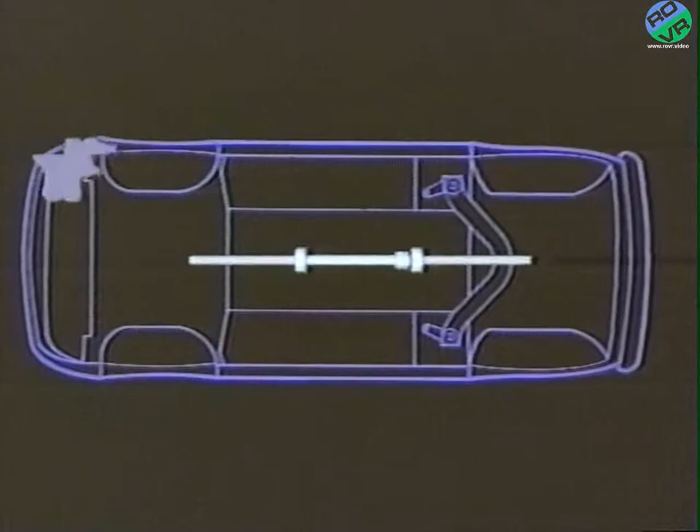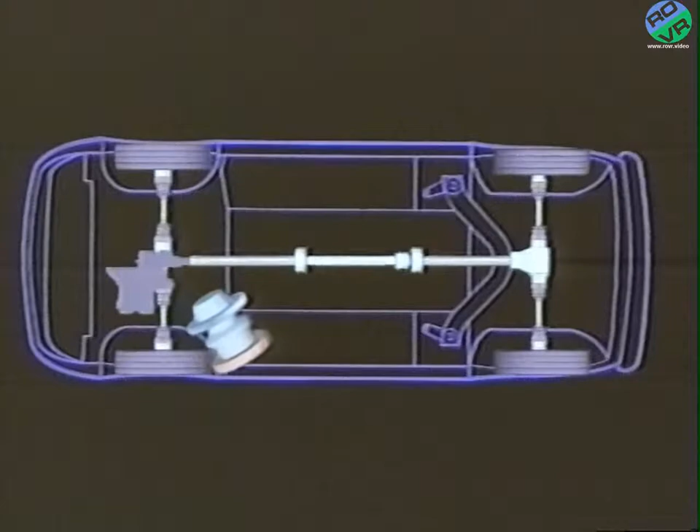The Talon's all-wheel drive system uses a center differential mounted on the output shaft of the conventional W5M33 front-wheel drive manual transaxle to distribute drive power to the front and rear wheels. Enclosed in the manual transaxle along with the center differential is a viscous coupling that controls differential action between the front and rear wheels.

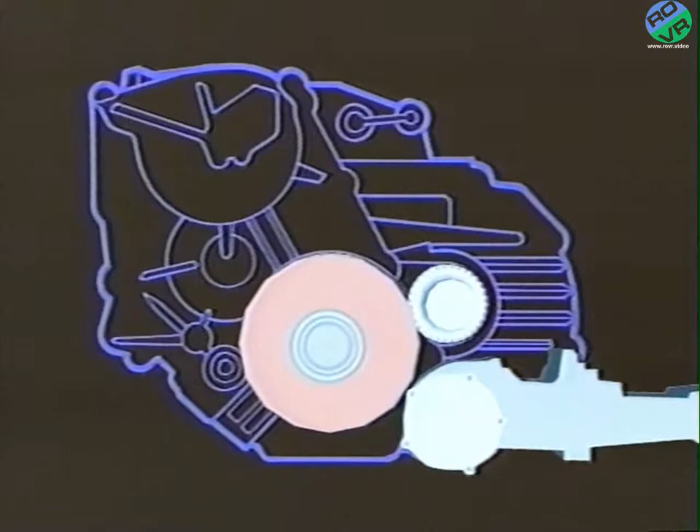Differential action by the viscous coupling takes place between the outer and inner hub of the center differential case. The outer hub delivers power to the front output shaft, driving the front differential. The front differential is an open type, located inside the transaxle. The inner hub is locked to the center shaft, or rear wheel drive shaft, delivering power to the transfer assembly and propeller shaft assembly, driving the rear axle differential.

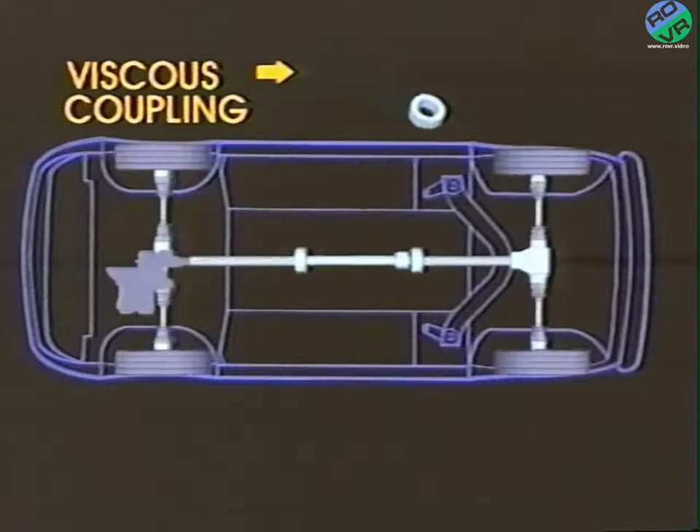There are two rear axle differentials available in the all-wheel drive system: the standard open differential and the optional viscous coupling type limited slip differential. The limited slip differential can be identified by a tag on the back of the housing.

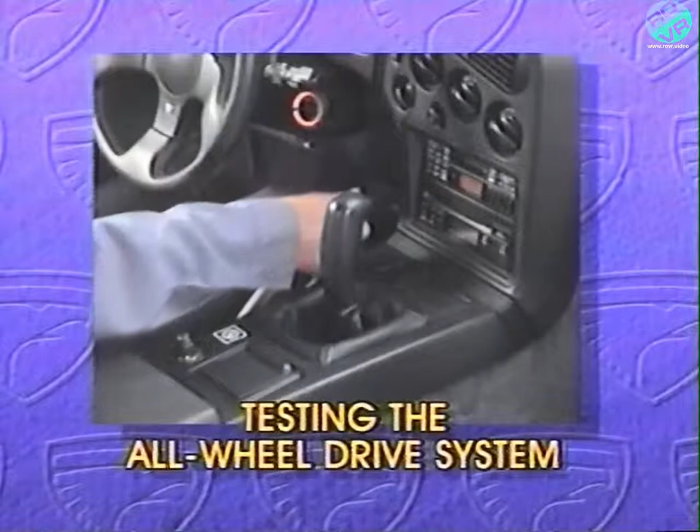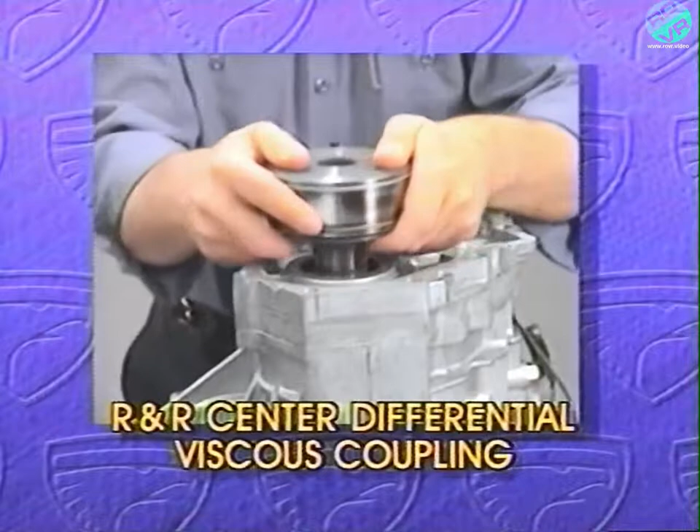Well, that's a general description of the all-wheel drive system, but today we're going to go a little deeper into this unique system. We'll explain how a viscous coupling operates and how it affects the operation of the all-wheel drive system. We'll provide you with a method for testing the viscous couplings on the all-wheel drive system. We'll take a look at the viscous coupling at the center differential and go over the procedure for removing and replacing it. And then we'll remove the viscous coupling from the limited slip differential in the rear axle.

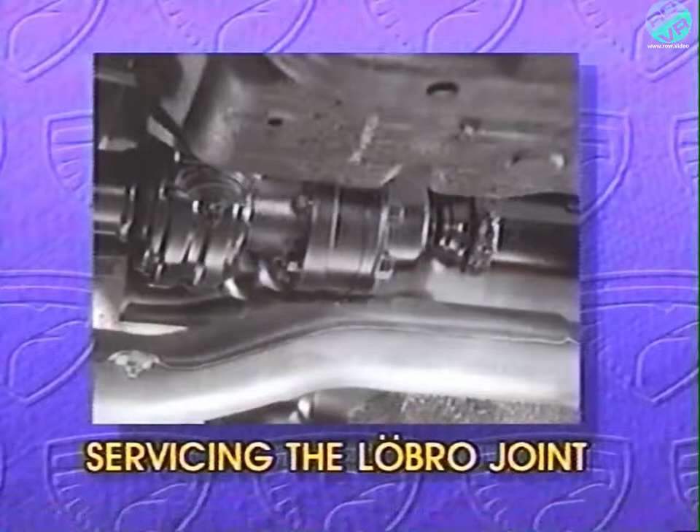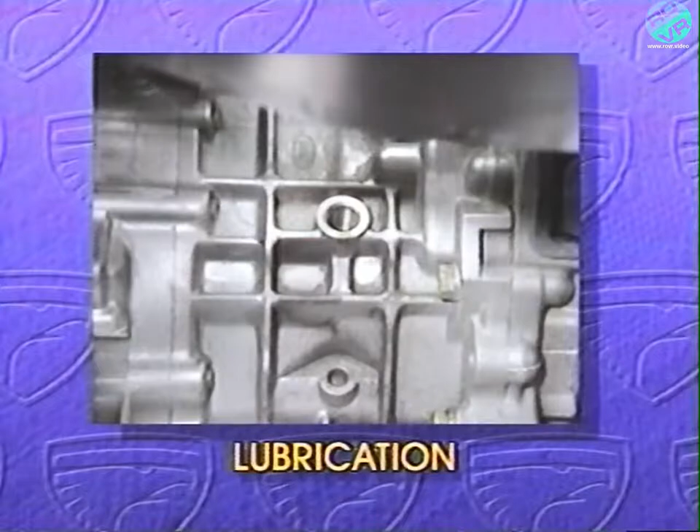We'll provide you with the servicing procedure for the Löbro joint on the prop shaft. And we'll discuss towing procedures. Finally, we'll discuss lubrication of the transaxle, transfer assembly, and rear axle of the all-wheel drive equipped Eagle Talon. So, let's get started by discussing how a viscous coupling operates.

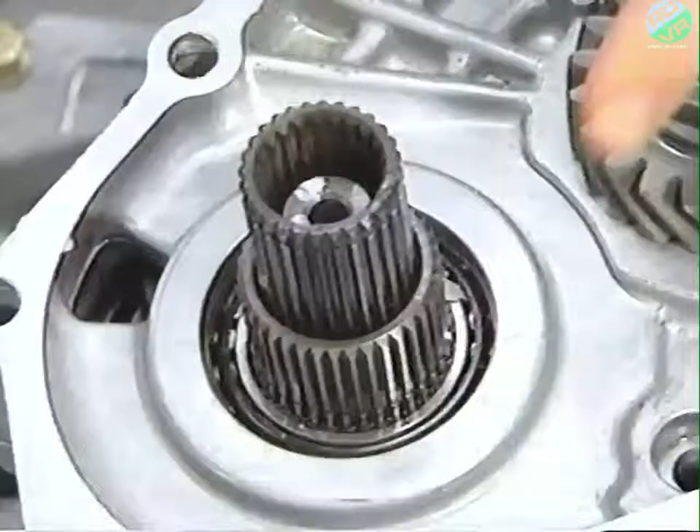A viscous coupling consists of two sets of plates which are splined to a two-part shaft assembly. At the viscous coupling on the center differential, the inner plates are splined to the inner hub of the differential, which rotates with the center shaft and drives the rear axle. The outer plates are splined to the outer hub of the differential, which drives the front axle.

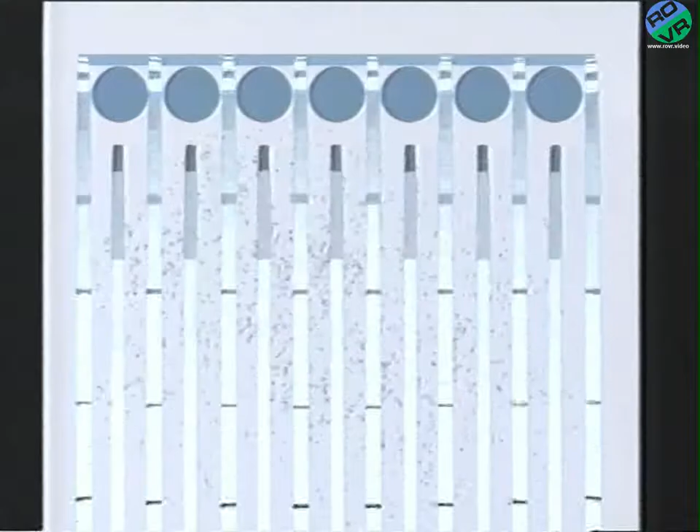Within the housing of the viscous coupling, the outer and inner plates are arranged alternately. The outer plates have spacer rings set between them on the outer edge in order to space them. The spacer rings are fixed to the housing. The inner plates have no spacer rings, and they can slide along the spline shaft between the outer plates. The plates are separated by a special silicone oil. The holes in the plates allow the silicone oil to flow through and to move with both inner and outer plates.

When the front and rear axles are moving at the same speed, the plates are moving at the same speed, and the viscous coupling does not differentiate torque. But when one set of plates begins to move at a higher speed, the silicone fluid exerts force on the slower moving plates to reduce the speed difference between the plates.

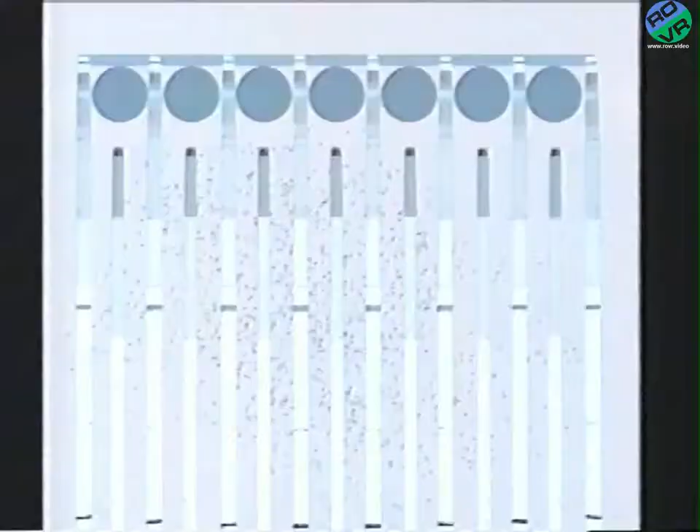Under extreme conditions, the temperature of the silicone oil rises. When this occurs, the oil escapes from between the plates and the plates lock together. This is called differential lockup. It eliminates any differential action and maximizes traction under slippery conditions. When the speed difference no longer exists, the temperature of the silicone oil drops and normal function is restored. This locking and unlocking of the viscous coupling has been termed humping.

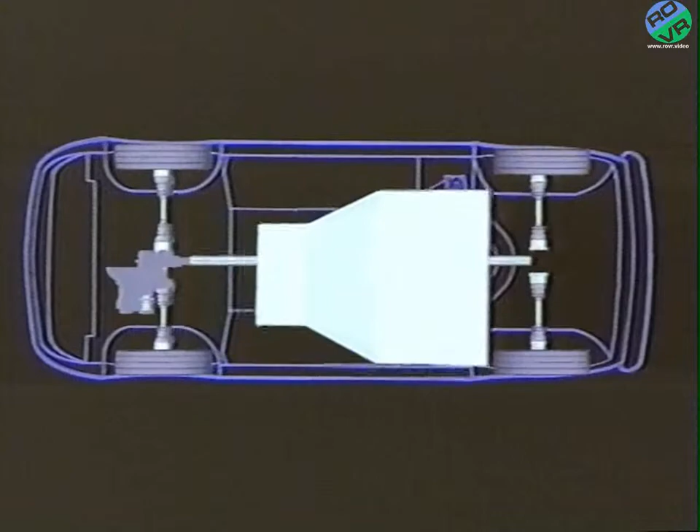Well, that gives you an idea of how the viscous coupling at the center differential operates and how it affects the operation of the all-wheel drive system. The optional limited slip differential in the rear axle uses a viscous coupling that has the same operating characteristics as the viscous coupling at the center differential, but it supplies torque between the left and right rear wheels. If you suspect that either the viscous coupling at the center differential or the viscous coupling in the rear axle is not working properly, you can verify operation by using the following procedures.

To test the viscous coupling at the center differential, raise all four wheels. Have a helper start the engine, release the parking brake, and shift the transaxle into first gear. Now, with the engine at idle, all four wheels should turn. If only the front wheels turn, the viscous coupling's not working properly.

Now, raise the RPM to about 1500 and slowly apply the parking brake. With the parking brakes applied, there should be a drop in RPM as a load is put on the engine by the viscous coupling, which is trying to equalize torque between the front and rear axles. Again, if there is no drop in RPM, the center differential viscous coupling is not working properly and should be replaced.

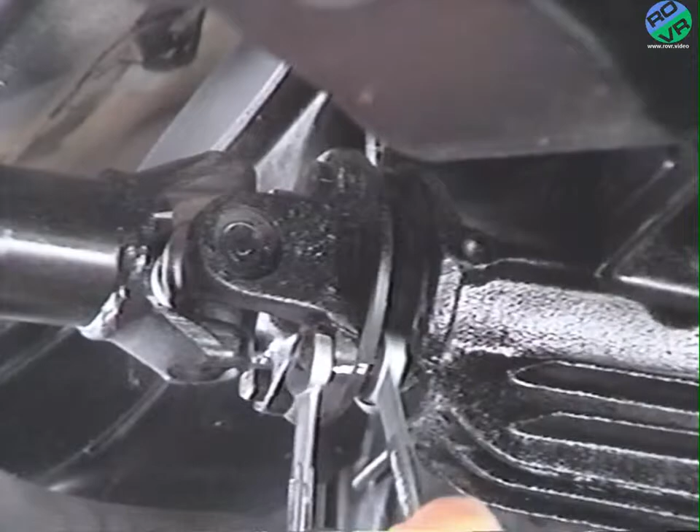To test the viscous coupling in the rear differential, move the transaxle shift lever to neutral and completely release the parking brake. Then raise and support the vehicle on the hoist. Place mating marks at the rear differential and propeller shaft coupling and remove the 4 bolts. Now, slowly rotate one of the rear wheels.

If the rear wheel on the other side turns in the same direction, the viscous coupling is okay. If the wheel turns in the opposite direction, replace the viscous unit. And remember, service the viscous couplings only by replacement. All right, now let's look at the procedure for replacing the viscous couplings. We'll start with the one in the transaxle.

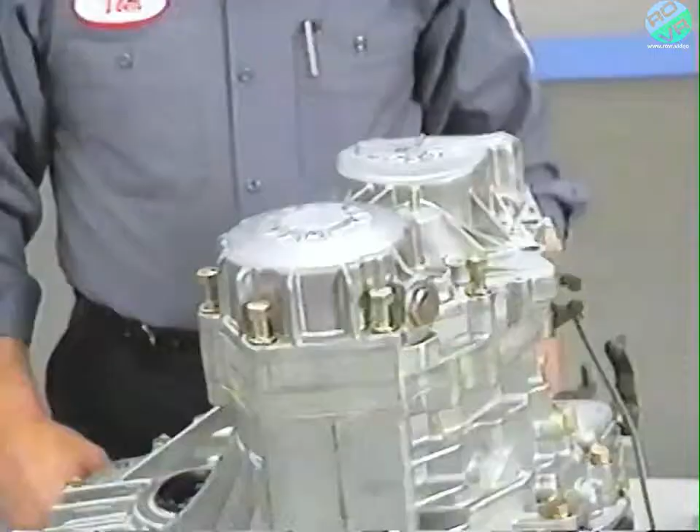In order to remove the viscous coupling at the center differential, you must remove the transaxle from the vehicle. This procedure is provided in the Laser Talon service manual, but we'll begin the procedure with the transaxle on the bench. First, remove the 11 bolts from the rear cover of the transaxle. Notice that the 2 bolts at the bottom of the cover are longer.

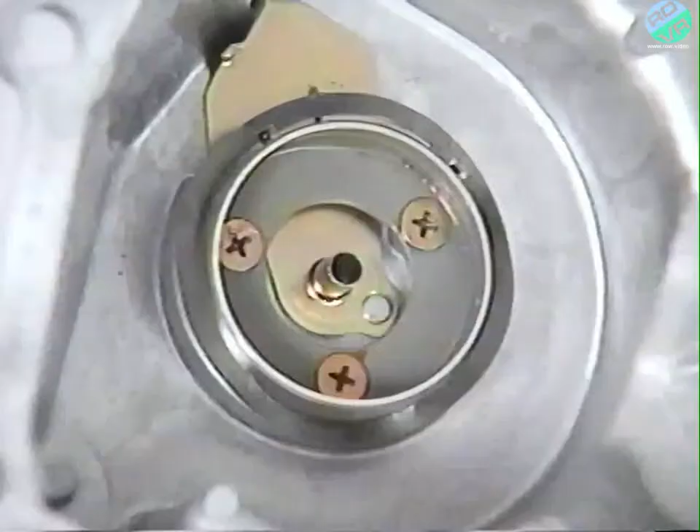Use a rubber mallet to break the seal and remove the cover from the transaxle. Place the cover where the oil guide won't be damaged. Be aware that there's a wave spring on the synchronizer assembly that could slip off during disassembly.

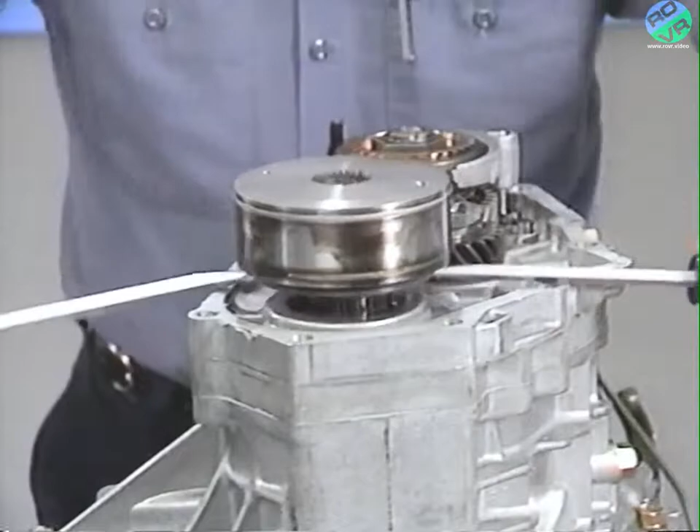Remove the snap ring from the center shaft and then remove the viscous coupling. You may need to pry off the viscous coupling with a flat blade screwdriver. Be sure not to lose the steel ball from the inner hub and center shaft.

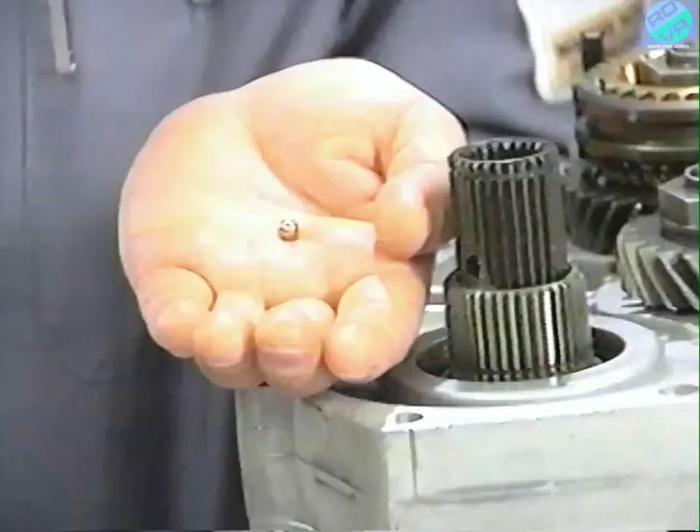The first step in replacing the viscous coupling is to install the steel ball into the groove in the center shaft. The ball can be held in place with petroleum jelly. It'll be necessary to push the center shaft up from the bottom of the transaxle until the ball drops into the slot in the center shaft. Now, install the viscous coupling, making sure the ball stays in place.

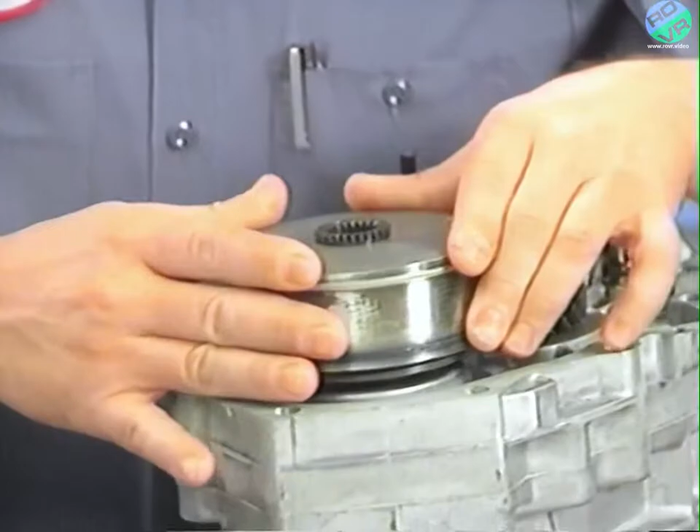Next, support the center shaft from the bottom and measure the snap ring groove with a feeler gauge. Select a snap ring so that the end play in the viscous coupling is within specification. End play must be 4 to 10 thousandths of an inch. For example, if the snap ring groove measures 66 thousandths, we need a snap ring that's between 56 thousandths and 62 thousandths, so that end play is between 4 and 10 thousandths.

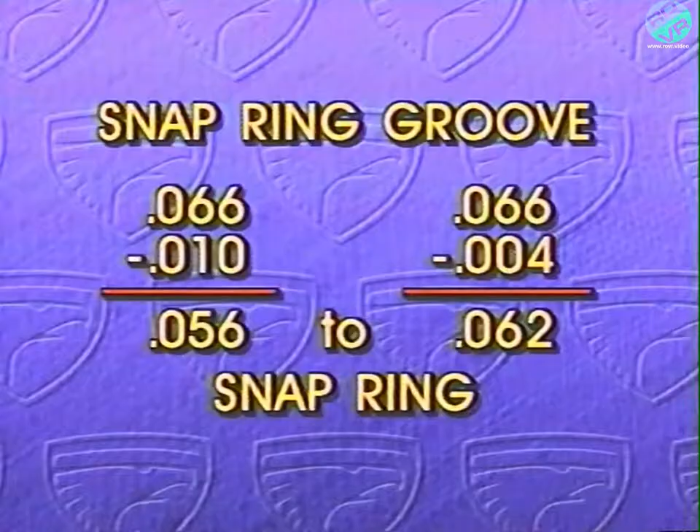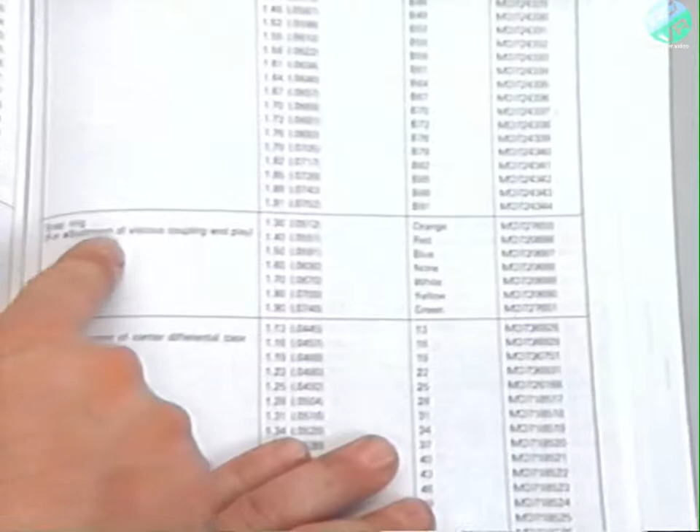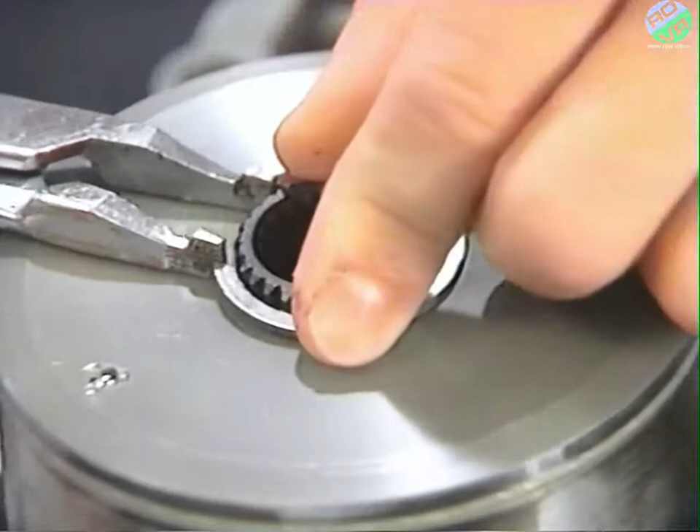A list of snap ring sizes is provided in section 21 of the Laser Talon service manual. We see that the proper snap ring is 59 thousandths thick. The service manual tells us it's the snap ring with the blue identification symbol. Install the new snap ring with a pair of snap ring pliers.

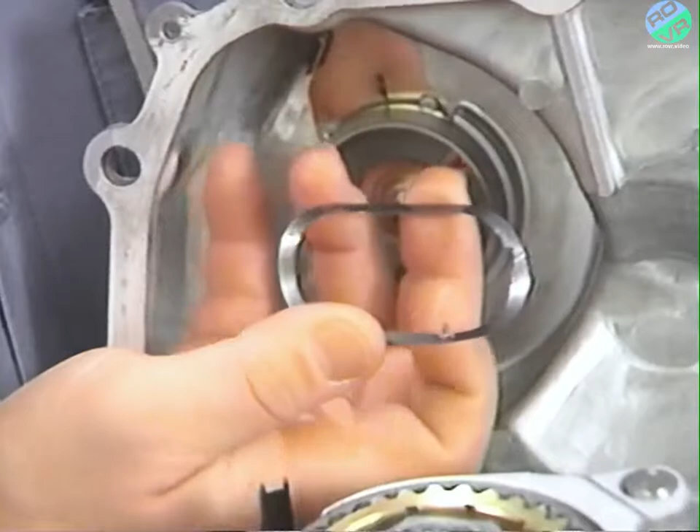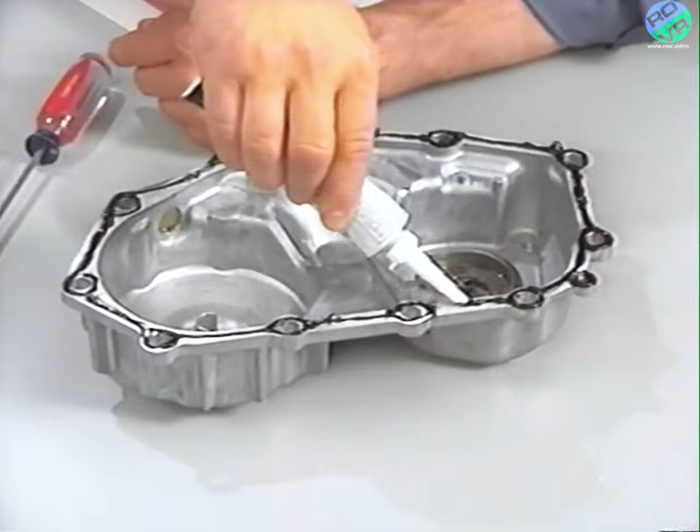And before replacing the cover, be sure that the wave spring is installed properly on the synchronizer. There are 2 lugs that hold the spring in place. When installing the rear cover, be sure not to distort the oil guides. Apply sealant to the rear cover. The specified sealant is MOPAR silicone rubber adhesive sealant or equivalent. Now, install the rear cover.

Before replacing the rear cover bolts, apply adhesive to the threads. MOPAR stud and bearing mount is recommended. Now, install the bolts and tighten to the specification provided in the service manual. That's the procedure for replacing the viscous coupling in the transaxle. Now let's remove the viscous coupling from the rear differential.

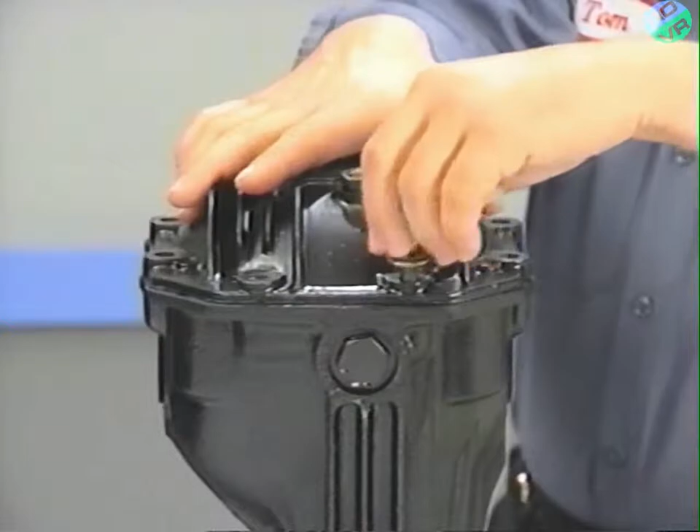After the rear axle gear carrier has been removed from the vehicle, remove the 8 bolts from the differential cover and remove the cover. Remove the 4 bolts that hold the bearing caps to the gear carrier. Mark the caps and remove them.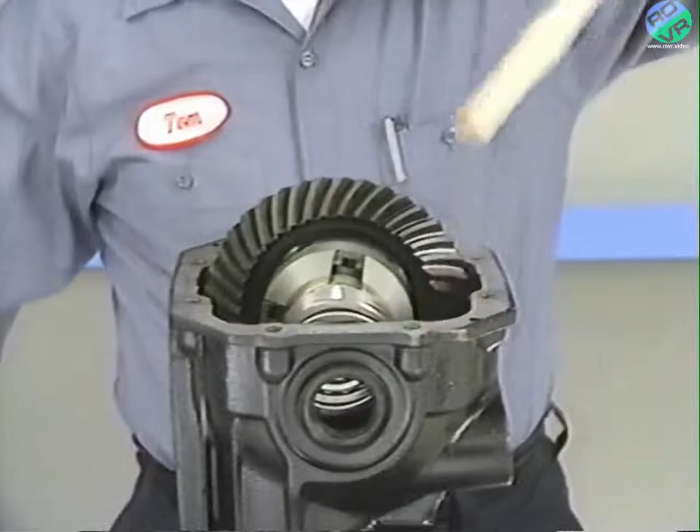Slowly pry out the differential carrier assembly with 2 hammer handles, being careful not to drop the outer race of the side bearings. And be sure to keep the right and left bearing components and spacers separate.

Next, put the carrier assembly into a vise and make mating marks on the ring gear and both halves of the carrier assembly. Remove the bolts from the ring gear in a diagonal sequence. Now remove the ring gear from the assembly with a brass hammer or brass drift.

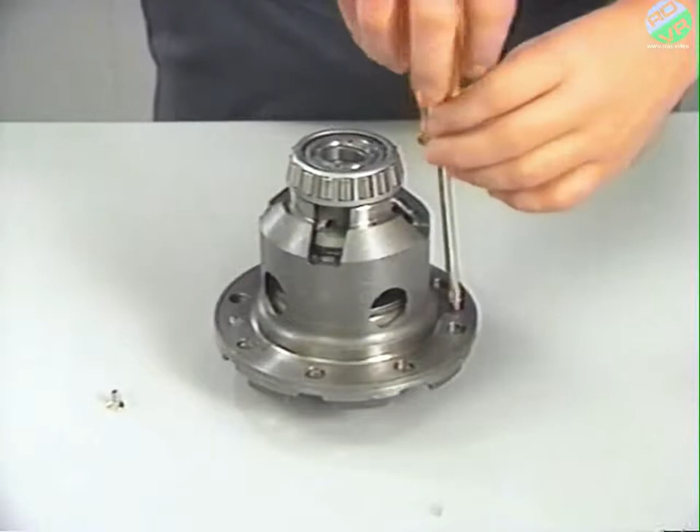Remove the 2 screws from the differential case halves, turn the case over, and separate the case halves. You can now remove the viscous coupling. Install the new viscous coupling in the differential carrier and complete the reassembly using the instructions in the service manual.

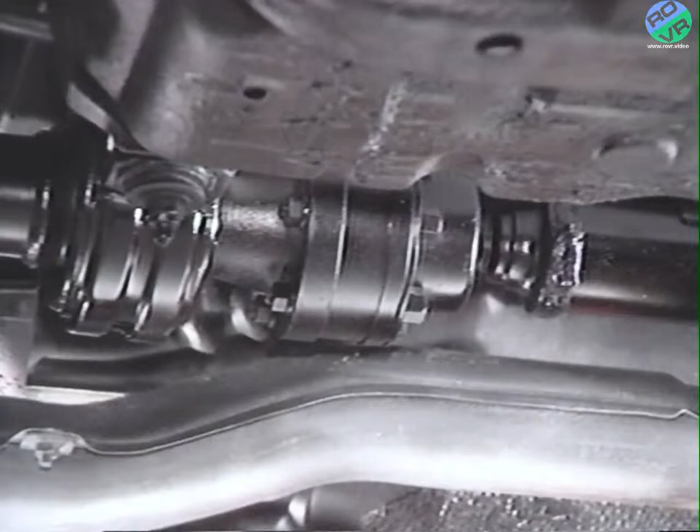The Lobro joint, or number 3 universal joint, on the 3-piece 4-joint propeller shaft assembly absorbs longitudinal movement and angle change and reduces vibration. As with any booted joint, the Lobro joint boot should be inspected once a year, or every 15,000 miles, for damage or leakage of lubricant.

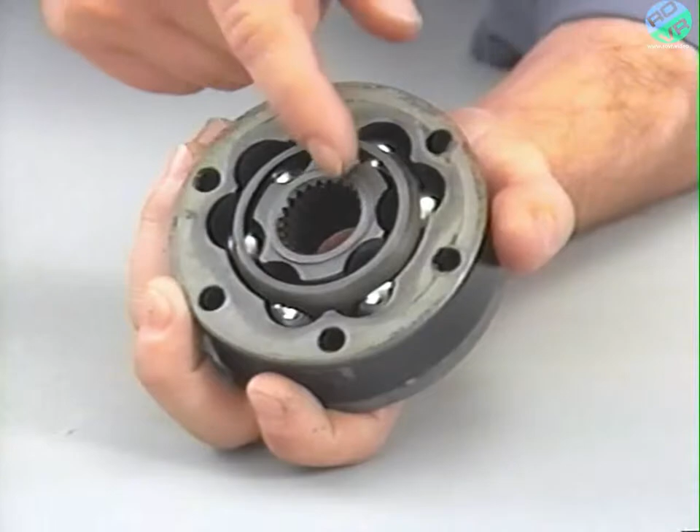The Lobro joint consists of an inner and outer race, 6 balls, and a cage to hold the balls. When longitudinal or angular change takes place along the prop shaft, the balls move in the inner and outer race grooves to absorb the movement. If the Lobro joint boot is damaged or leaking, the boot must be replaced. If the boot is damaged, the Lobro joint may also require lubrication or replacement.

Okay, let's go over the procedure for servicing the Lobro joint. In order to service the Lobro joint assembly, you must remove the prop shaft assembly from the vehicle. First, support the prop shaft assembly and place mating marks at the rear prop shaft and differential coupling. You can now disconnect the coupling by removing the 4 bolts.

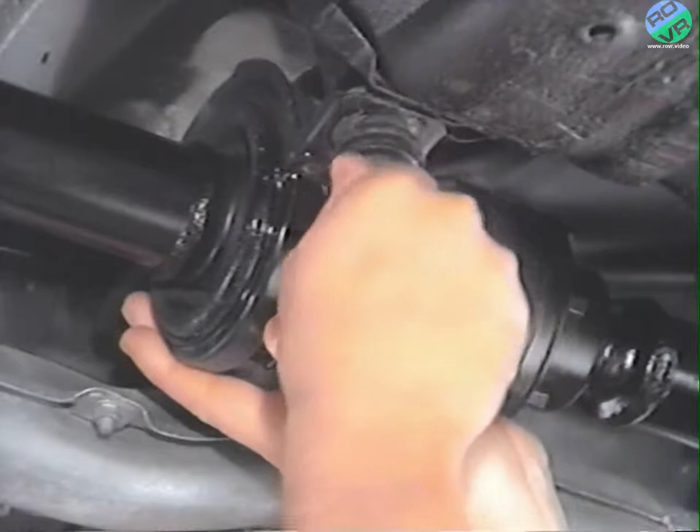Mark the prop shafts for reassembly. Then remove the nuts from the center bearing assembly between the rear and center prop shaft, and the center bearing assembly between the center and front prop shaft.

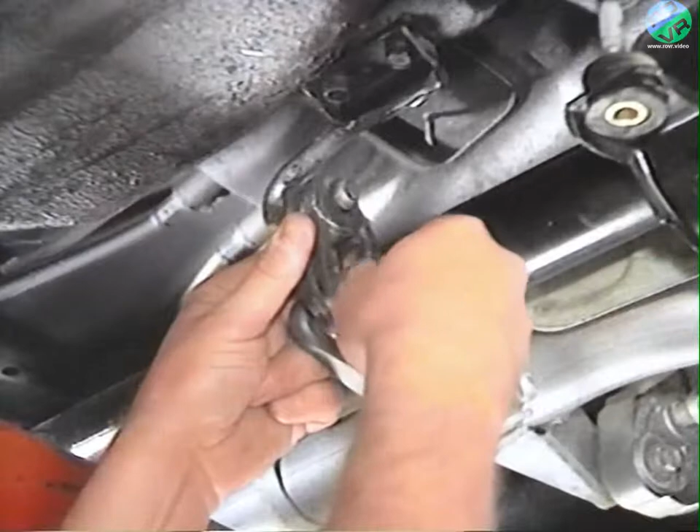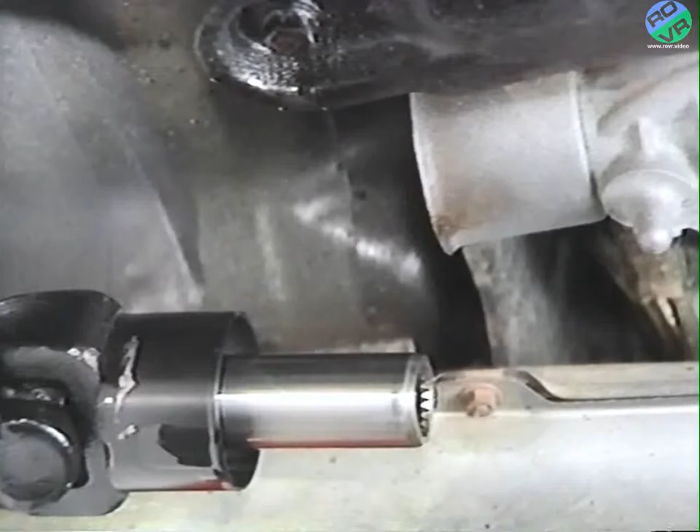Remove the rubber grommet from the muffler clamp at the center of the vehicle to provide clearance for prop shaft assembly removal. The shaft assembly is now ready to be removed. Slide the assembly rearward to remove the sleeve yoke from inside the transfer assembly, and then slide the assembly forward through the muffler clamp. You may need help removing the prop shaft assembly.

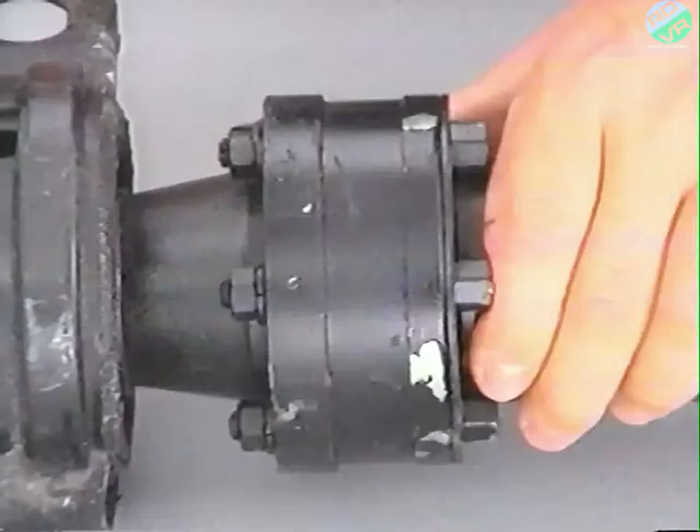With the prop shaft assembly on the bench, place mating marks on the companion flange and the Lobro joint assembly. Remove the joint retaining bolts and separate the joint from the companion flange. Then remove the rubber packing.

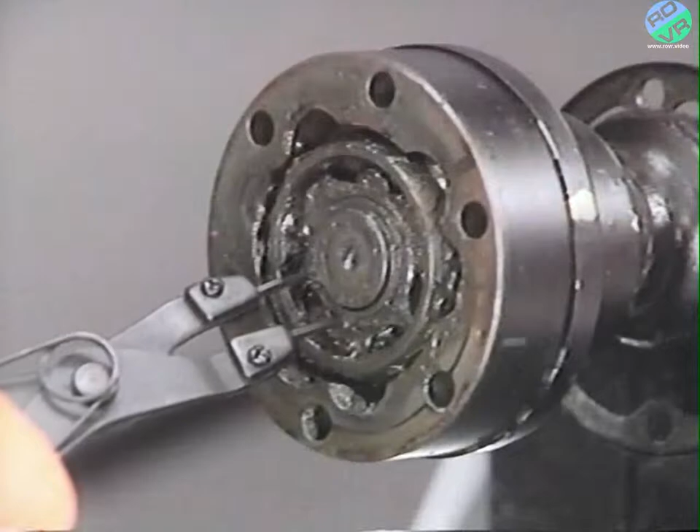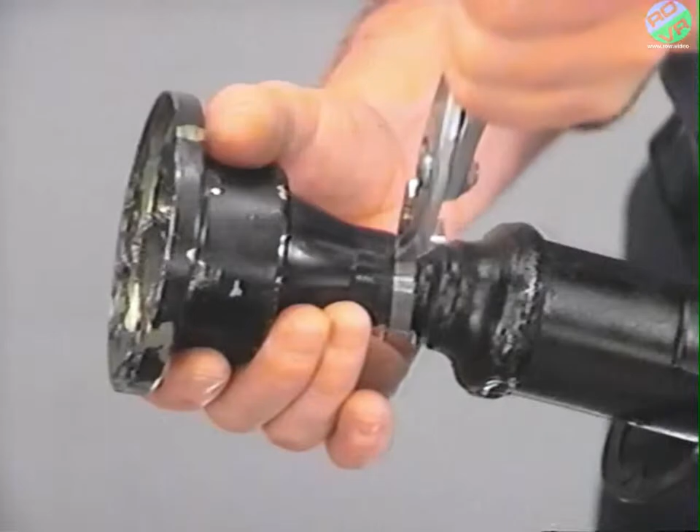To remove the joint from the prop shaft, remove the snap ring and remove the boot from the joint. Remove the joint from the prop shaft with a puller. Now, carefully loosen the boot band and remove the boot.

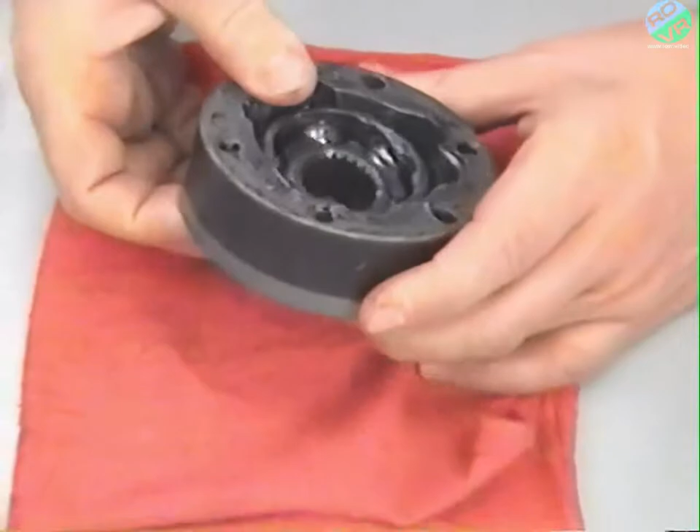To disassemble the Lobro joint, scribe mating marks on the outer race, cage, and inner race, and mark the outer race so that the balls can be reinstalled in their original positions. Remove the outer race and balls, noting location for reassembly. Clean off the old grease from the outer and inner race, cage, and balls.

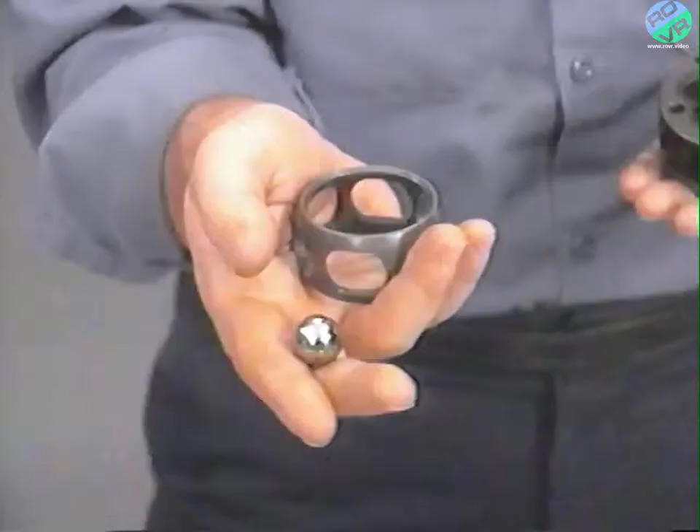Check the ball grooves in the inner and outer races for wear, damage, or rust. Check the ball surfaces for rust, wear, or other damage. And check the cage for damage. If there is damage, replace the entire Lobro joint. If the Lobro joint is okay, reassemble it as follows.

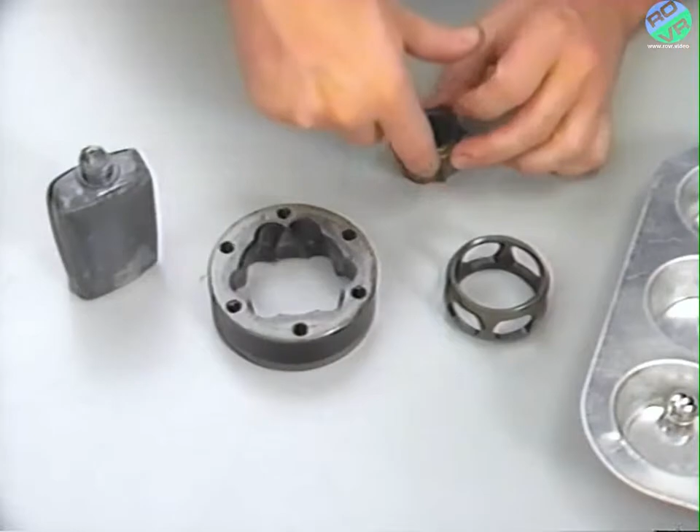Apply a thin coat of the grease that's supplied in the repair kit to the ball grooves on the inner and outer races. Be sure not to use any other grease than that supplied in the repair kit. Put the cage on the inner race with the mating marks aligned and install 2 balls in grooves directly opposite each other. Both balls should be placed in their original grooves.

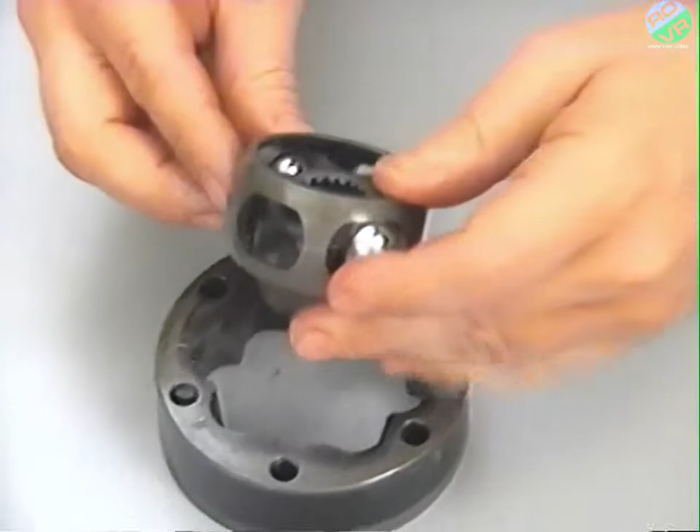Align the mating marks and assemble the inner race and cage in the outer race. When properly assembled, the recessed end of the inner race, the recessed end of the outer race, and the chamfered end of the cage are all on the same side. Rotate the inner race so that the remaining balls can be installed. Then, check that the outer race rotates on the inner race smoothly.

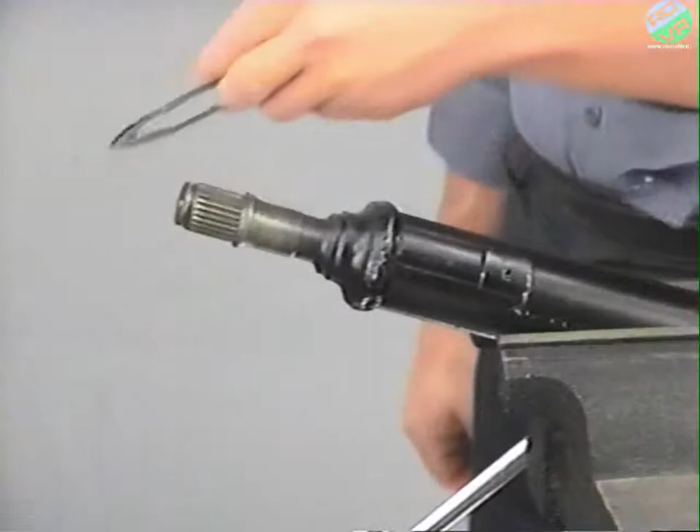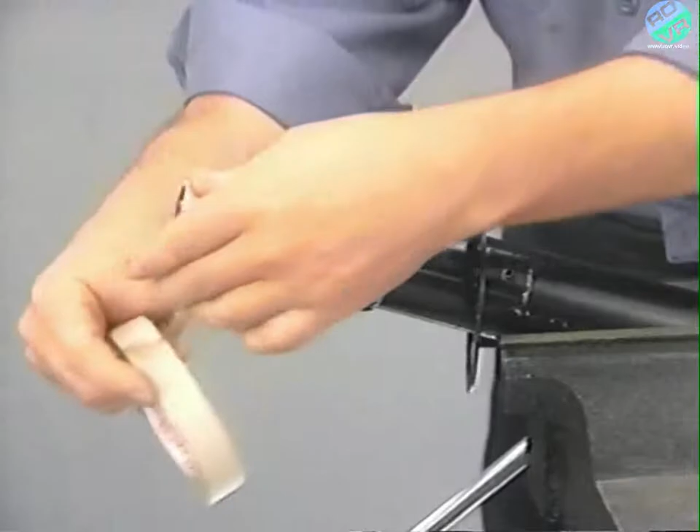Before installing the Lobro joint, install the washer and boot band on the center prop shaft and wrap the splined end of the prop shaft with tape. Install the boot on the prop shaft and then remove the tape.

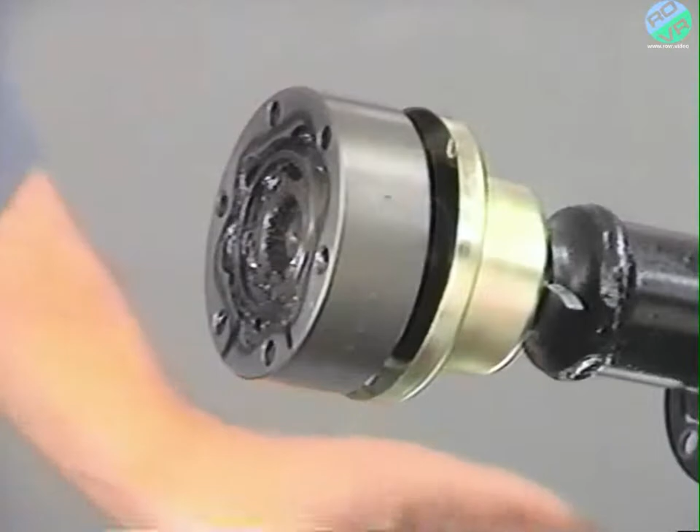Apply all of the grease from the repair kit to the Lobro joint and apply a thin and even coat of the grease to the rubber packing and then fit the packing on the boot side end of the joint. Install the Lobro joint on the center propeller shaft while aligning the bolt holes and make sure it's properly seated. Secure the inner race with the snap ring and realign the bolt holes.

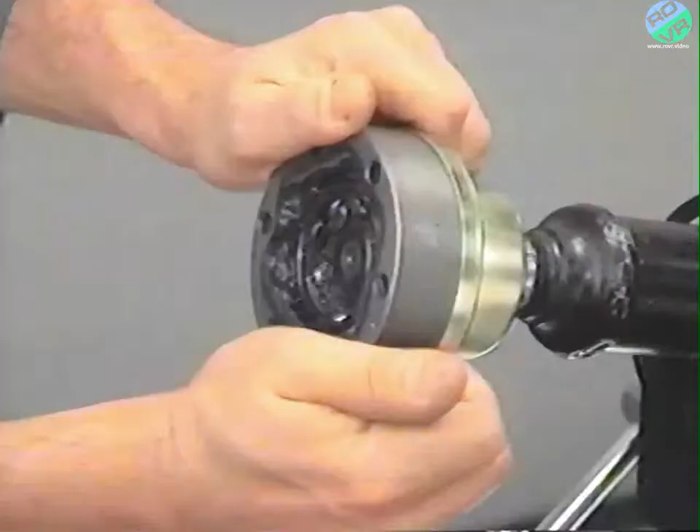Fit the boot on the joint and secure the boot with the boot band. Be sure to position the boot band clip on the side opposite the bosses, which are provided in the boot for ventilation, and then remove grease from around the bosses. Grease obstructs the vent air passage. Finally, check that the joint assembly moves smoothly.

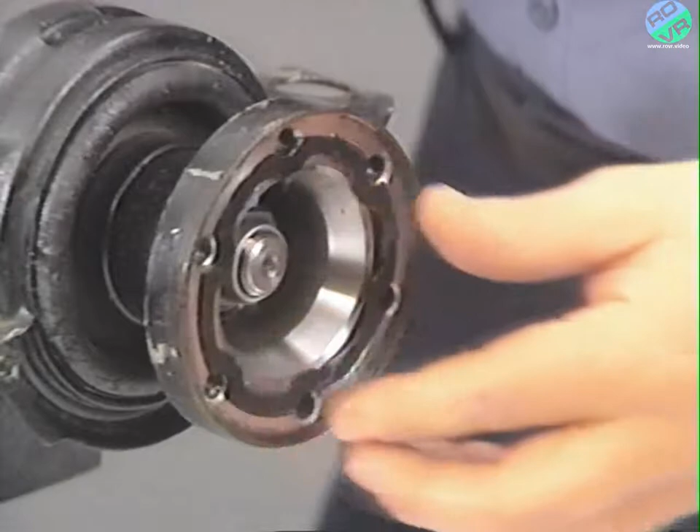Apply a thin and even coat of grease to the other rubber packing and fit it onto the companion flange. Then, if using the old joint, align the companion flange with the mating marks. Reassemble and torque the bolts to the proper specification. Okay, the prop shaft can now be reinstalled in the vehicle.

When towing an all-wheel drive vehicle, precautions must be taken so that the viscous couplings aren't damaged. The all-wheel drive Talon should be towed with all 4 wheels raised. Now, this can be done using a flatbed truck or with all 4 wheels on dollies. The shift lever should be set to first gear and the parking brake applied.

The vehicle may also be towed with a rope or cable, as long as the front and rear wheels rotate normally and the various mechanisms function normally. To tow with a cable, the shift lever must be in the neutral position and the ignition key set to accessory. The point is, the all-wheel drive Talon must not be towed with one set of wheels turning while the other set remains stationary. Towing in this way will damage the viscous couplings.

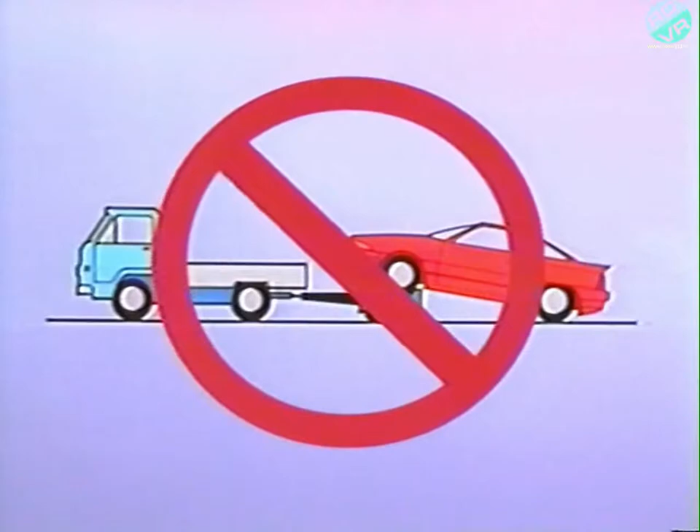And one more thing, never try to start the vehicle by towing or pushing. Pushing or towing to start a vehicle with a manual transaxle can cause overheating of the transaxle and damage to the catalytic converter.

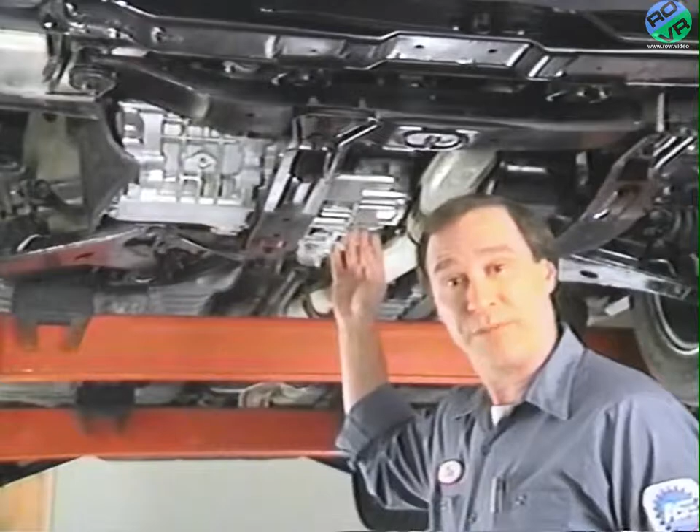In order for the all-wheel drive system to operate properly, it must be properly maintained. One of the most important maintenance steps is proper lubrication. As outlined in the maintenance schedule, the transaxle and transfer assembly lubricant should be checked periodically. The transaxle and transfer assembly have separate filler plugs, and they must be checked separately.

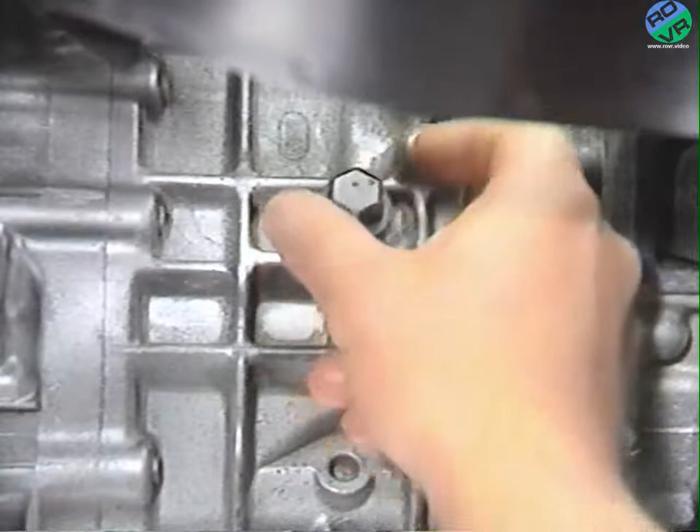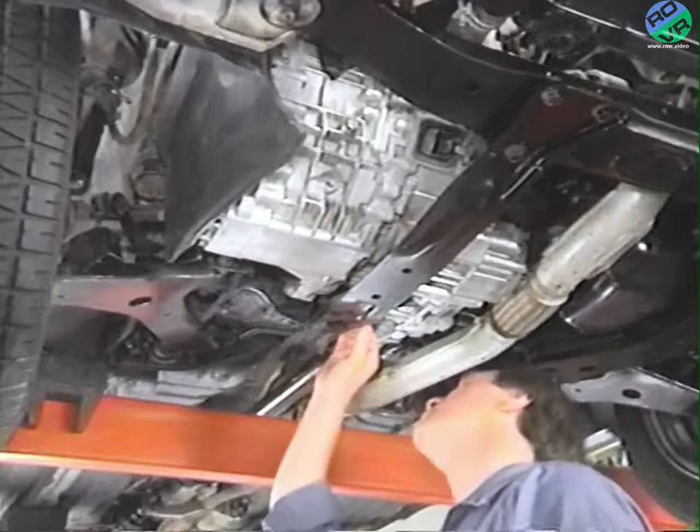To check the oil, be sure the vehicle is level. Then remove the filler plug. The oil level in the transaxle should be up to the lower edge of the filler plug hole. The oil level in the transfer assembly should also be up to the lower edge of the filler plug hole. When inspecting the manual transaxle and transfer assembly for proper lubrication, also inspect each component for evidence of leakage.

If it's necessary to change the transaxle lubricant, refill with 2.3 liters or 2.4 quarts of the recommended gear lubricant. The transfer assembly requires 0.6 liters or 0.63 quarts of the recommended gear lubricant. The manual transaxle and transfer assembly require MOPAR hypoid gear lubricant or lubricant with an API classification of GL-4 or higher and an SAE winter rating of 75W to 85W.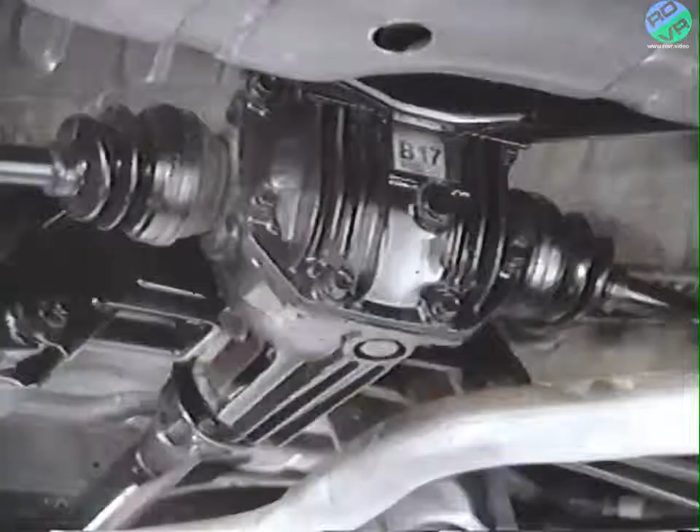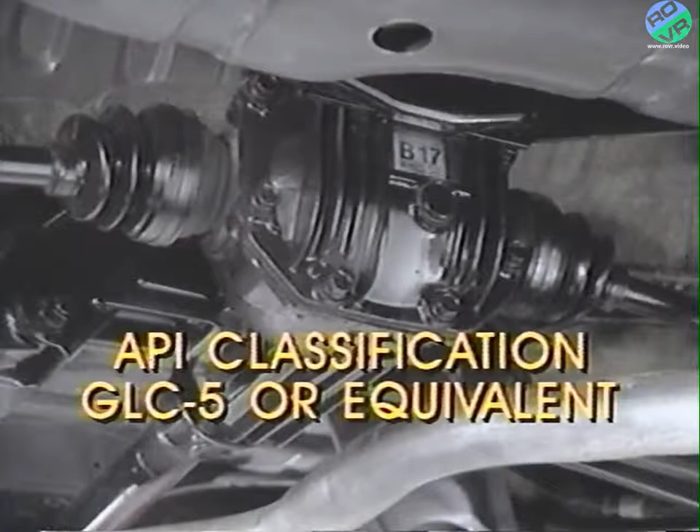The rear axle differential requires 0.7 liters, or 3/4 of a quart, of the recommended gear lubricant. Rear axle lubricant should have an API classification of GL-5 or equivalent. MOPAR 75W90 gear lubricant is recommended for most temperature ranges. A rear axle lubricant viscosity chart for different temperature ranges is included in both the service and owner's manual.

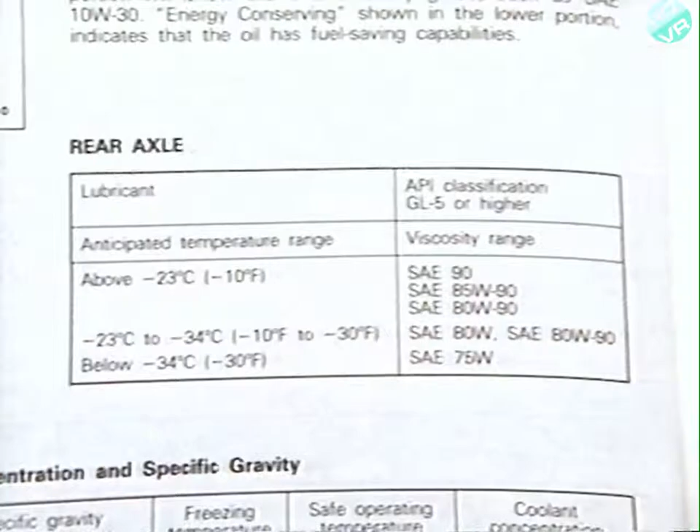Well, we've explained how the all-wheel drive system operates. We've tested and serviced the viscous couplings and serviced the Lobro joint on the prop shaft assembly. Finally, we provided you with towing and lubrication information. Knowledge of these service procedures should improve your ability to service the all-wheel drive system on the Eagle Talon.